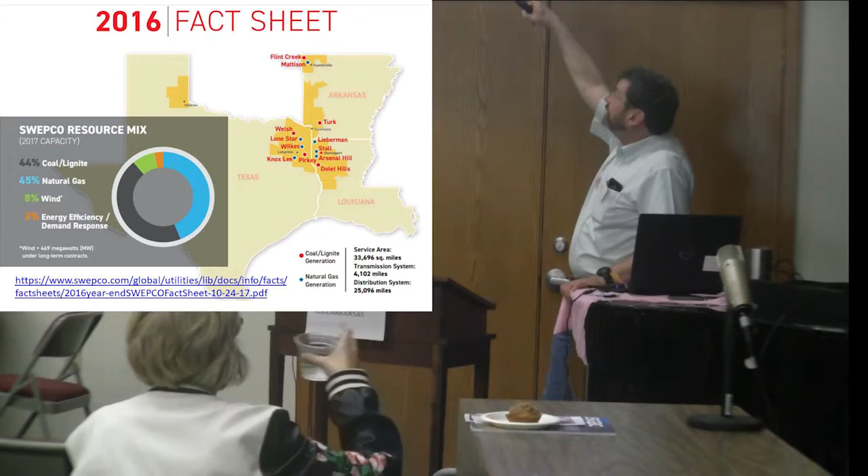So here in Northwest Arkansas, SWEPCO is one of the main utility providers. SWEPCO and the Ozarks. Help me out, Orlo. Thank you. So, but SWEPCO's balance at the present is almost 90% fossil fuel.

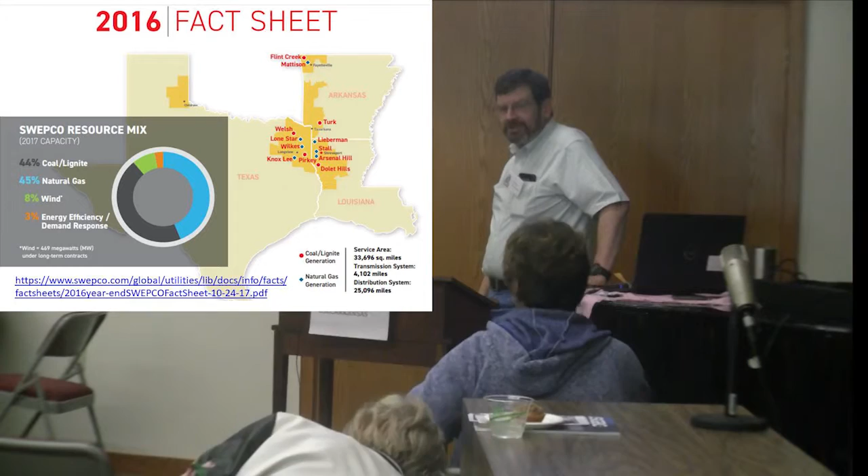So, what do you do as an individual? There's Arcadia where you can get... Good point, yes. So anywhere in Arkansas and anywhere in the country, you can sign up for Arcadia Power. ArcadiaPower.com, and you get 50% renewable energy for the same price you're already paying. Identical price, no more money.

And then for a few shekels more per month, you can get 100% renewable energy. What they do is they buy renewable energy credits. So yes, good point.

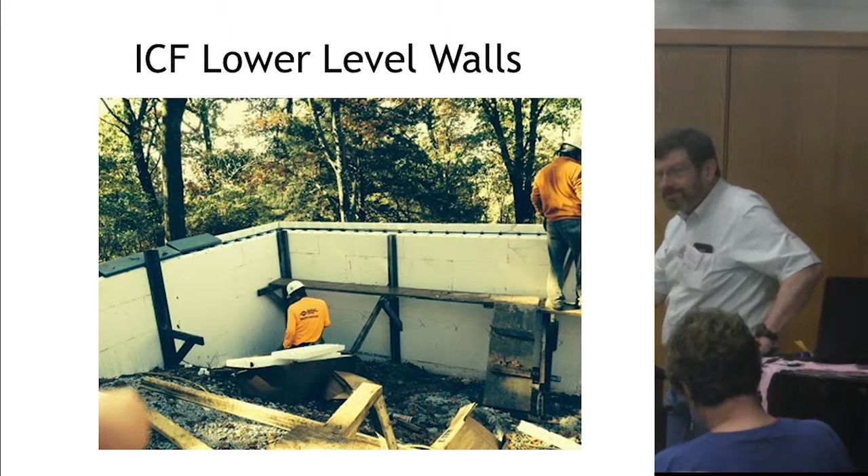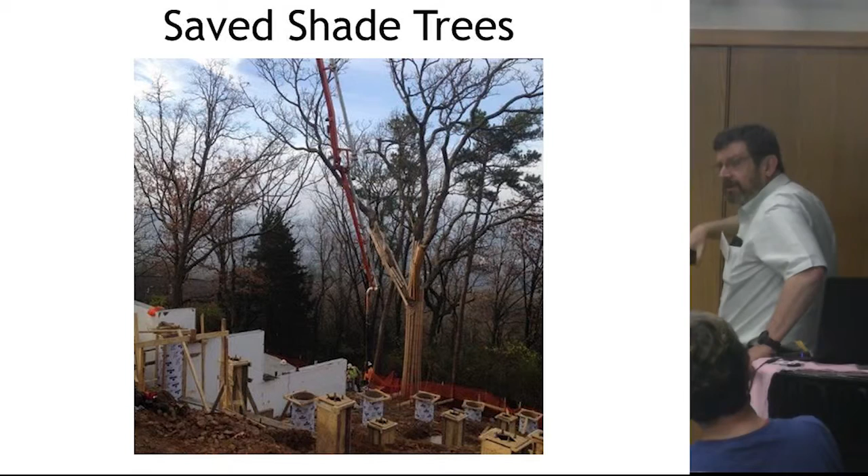Then you have to have rebar too, because concrete is good in compression, but not in tension. And that means that if you didn't have the rebar, the wall could fall over easily. And here's another view. And we protected the tree, and there's another elm tree in the front yard that got a little bit of protection as well because they were in the construction zone.

This shows the spray foam insulation, and it seals very well. So it offers insulation and sealing. Now there's three things you need to be concerned about in trying to reduce your energy consumption. One is convection, and then conduction, and radiation.

And this picture shows all three because the windows are high efficiency windows. That's where you lose your radiation losses. And the convection means like air loss. So if you're sealed tight, then you don't have air loss. And the conduction is the insulation properties. And I'll show you another slide in a moment.

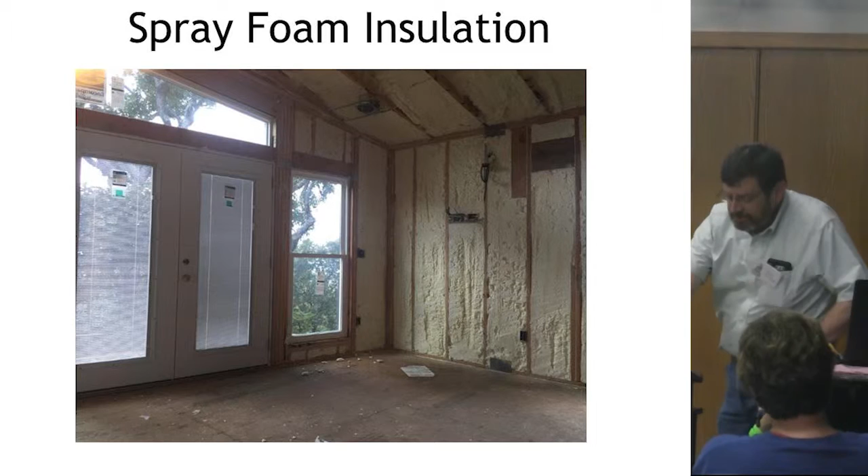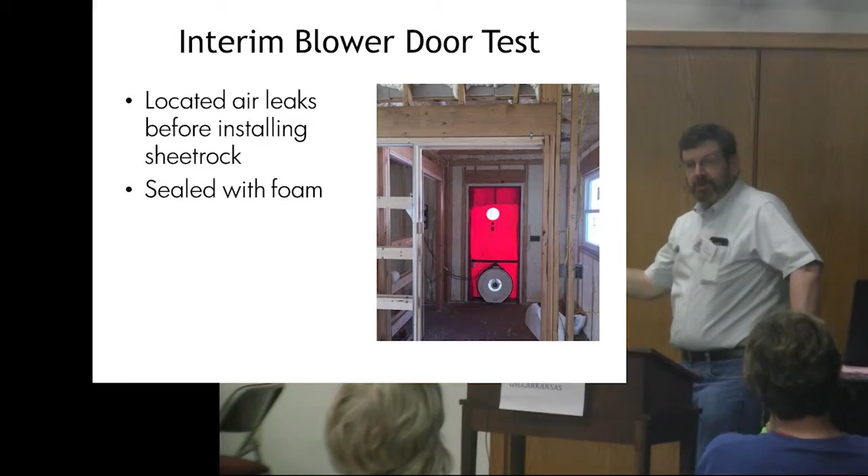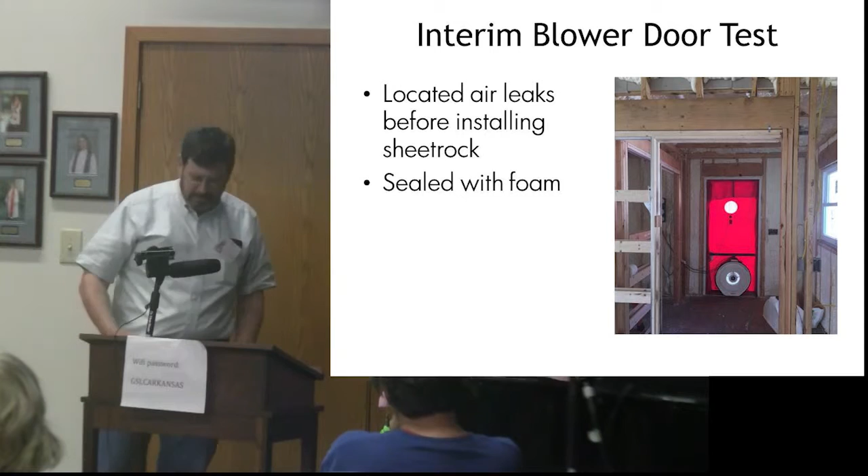Can you say what thermal bridging is? That's the conduction, like when you have a wood stud, there's a tendency, and the difference of temperature from inside to outside, either it's hot outside and cool inside, or it's cold outside and you want to stay warm inside. So the thermal bridging is that the studs are solid and they'll conduct energy from the inside to the outside or from the outside to the inside.

And that's what the infrared cameras tell you. So in order to prevent that, you need some insulation to cut the thermal communication with the outside world, essentially.

Also, now Michelle talked about heat pumps. Heat pumps are great. This particular heat pump is rated a 19 to 20 in cooling and 8.5 to 10 in the heating cycle. There's no gas line to the house, so it's an all electric home. So that was one thing that Michelle was just talking about.

Another thing is heating water, and so these are flash water heaters, electric water heaters, and they work great. And they're small. It's just a box about this big, about this thin, maybe 4 inches thick. And it heats all the water in the home. We have two of them, one for the lower 2 floors and one for the upper floor.

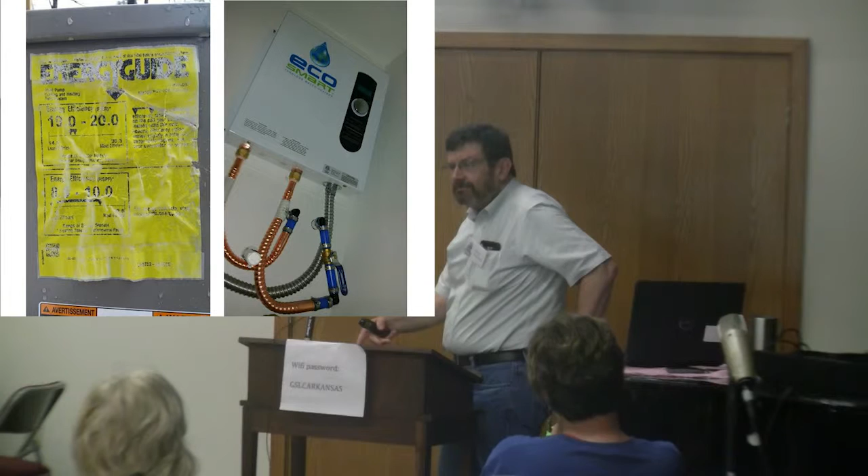We haven't had any trouble with them at all. Now, you do need to treat them for lime every once in a while, you know, get the scale off the pipes on the inside, but yeah, we haven't had any trouble yet. In 2 years, yeah.

This shows a couple of things. This shows both the employment possibilities of solar and, you know, our view, which is why we chose the site, and the solar panels. We have 42 solar panels at home, and they're the smaller size ones. The ones on the roof here are slightly bigger.

They're 72 cell units, so they're 2 meters by 1 meter up here. They're 1.8 meters by 1 in the ones we have at home. And those are 285 watts, and these are 320 watt units. So I could easily bore you with lots of details, but I'll go on.

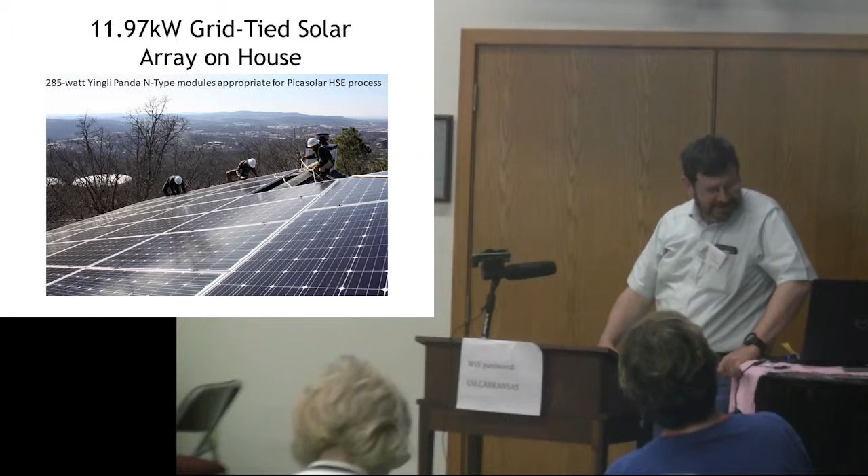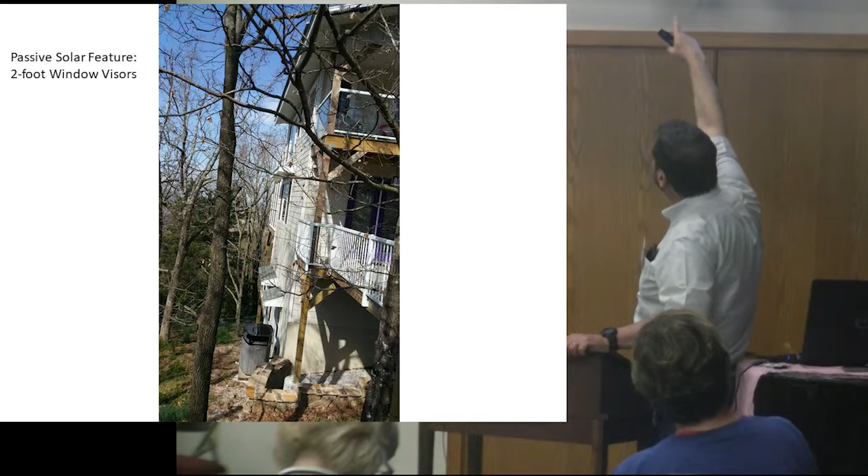Here we have another aspect of the home, and this is something Orlo has fought for his whole life since he started his company in '78. These are part of a passive solar design. Those little visors over the south-facing windows are about 2 feet, which allows sun in in the winter, and keeps the windows shaded in the summer.

And this is something else that Orlo told us about, these diamond-shaped blinds. These are good insulating blinds, and they provide like an air barrier between the room and the outside. And you have them at your offices. Yes, and at our home too. Yeah.

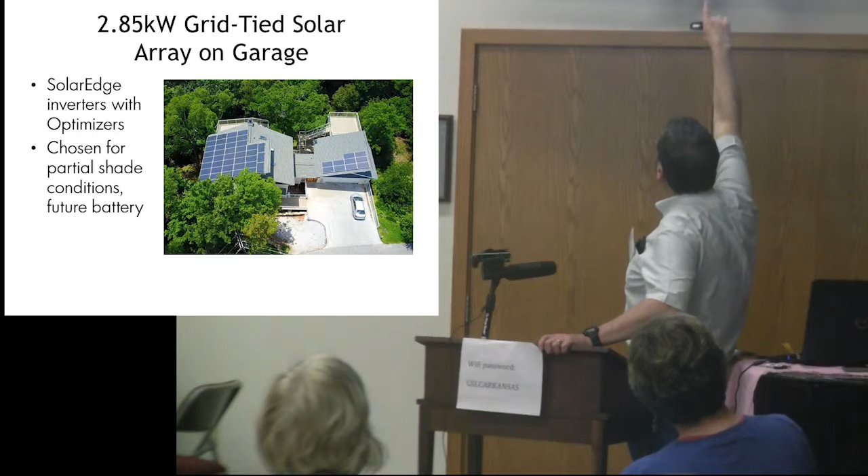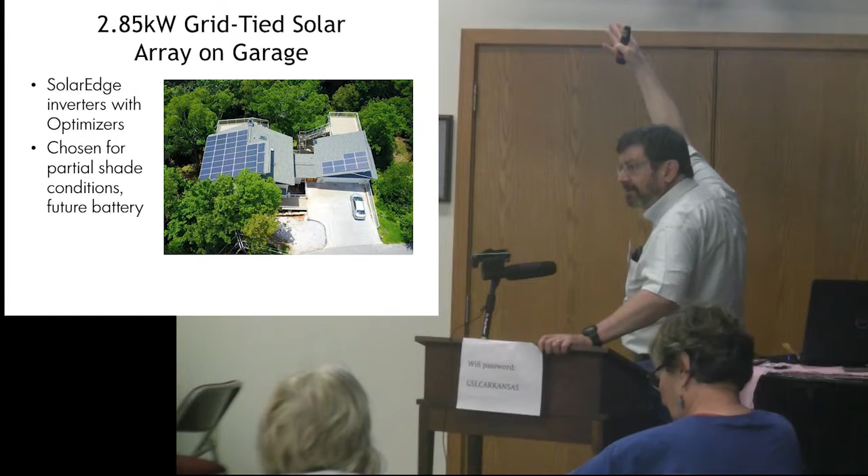Wait, so clear stories are what? Well, okay, there's north-facing windows. Yeah, this isn't going to work on there. But in the shade, there's vertical windows, and that's way up in the bathroom, so like 15 feet up. But it allows the roof line to continue on up.

You're still not, okay. Maybe I can do it with this. It's an extension of the roof like this. It's like a fake roof, with solar panels on it. Okay, see the cursor? So that's called a clear story. People do it for style, but he did it for solar. Right. I wanted the extra room just in case.

So, oops, oh no, I messed it up.

Okay, good. And this is something that Michelle was talking about earlier as well. This is a rating, and oh, I didn't mention something. This is a blower door test that's part of the construction process with the stick group. This is one that they own, and then the raters come in later on with their own official rating.

But in the stick group, Mac, the construction manager, used this to track down any leaks that he found, and he was able to fill them right away before the drywall was hung up. But you can get that on any house. Yeah, right, yes. Do the blower door test, yeah.

We did that in our Van Buren house that we retrofit considerably, and it had the same number of panels, a little bit less power, but it wasn't able to be a net zero home, although the solar was nice, and we had lots of extra features there. We insulated as much as we could, but you just can't do a retrofit as tight as you can do an intentional build.

Okay. So this is one of the results of using the blower door test. What it says is the average existing home rates 130 on this scale. Average new home would rate 100. This rates negative 27. Now the zero would be a net zero home without the transportation factor, without plugging in electric vehicles.

So the negative 27, we spent the extra money to get to that point in order to account for the cars. That's one way to think of it. And the electric vehicles cost much less to operate than a gas vehicle. They cost about 1/3 or 1/4 to operate. And when you have the solar panels, it's even less, because fueling a vehicle is much more expensive than fueling even your home.

And here's some proof. This is our energy bill. So zero energy used for over a year. So just the connect charge, just the customer charge, $8.76 a month. And here, that's an old photo, but this shows part of the feedback that I get every day, or anytime I feel like it, from an app on my phone to check on the solar system.

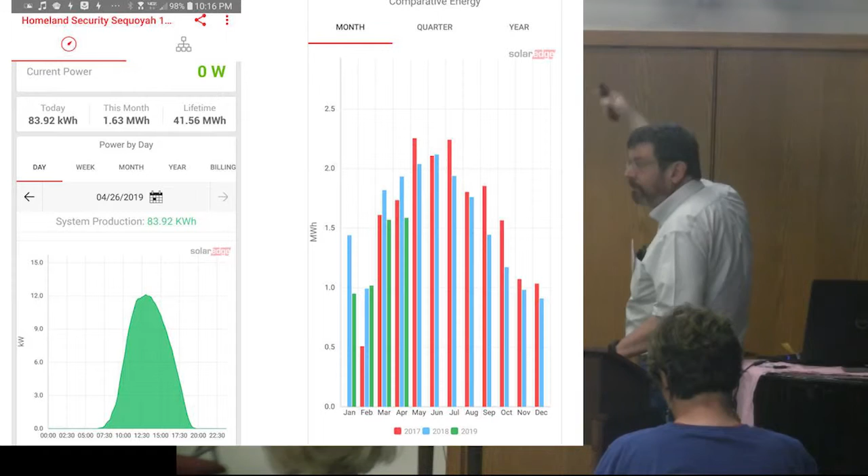And here's more recent data. So you can see 41.5 megawatt hours, and a megawatt hour is a lot of energy. A megawatt hour, retail, is worth about $100 or $110. So you multiply that times the 41.5 megawatt hours, and that's what we've generated in 2 years.

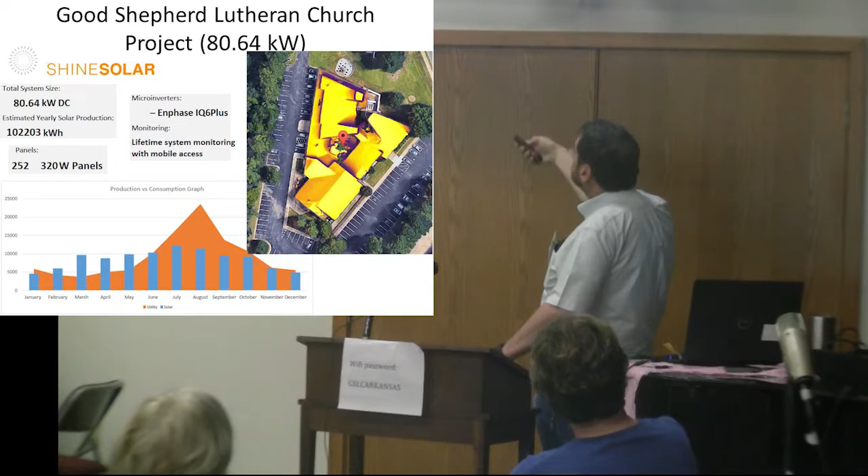And here's the plans for this church. I showed that earlier. And this is a reminder that $1.36 a watt is utility kind of pricing. Utilities pay that much money, or did up until recently. It's going closer and closer to $1 a watt, but a typical home installation is often probably $3 or $4 a watt. So we got an exceptional deal, and Shine did a good job. They're very organized, gave us a really low estimate, and followed through, did the work. So that's here. I showed that earlier.

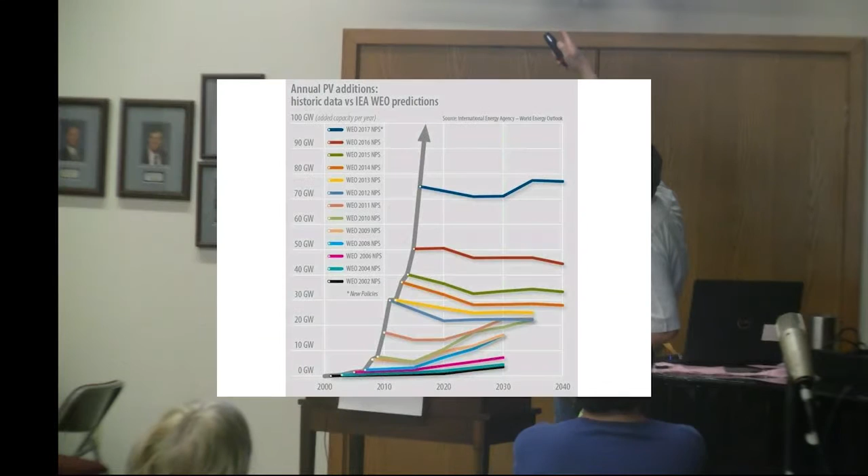And for a Model 3, like what I was able to get, Elon expects the batteries to last 300 to 500,000 miles of driving, and then cost about $4,000 to replace, which is extremely cheap relative to gasoline or diesel or any other way of transportation mobility.

I put this in here to explain: often in my class I show drag races between Tesla Model S performance vehicles and the fastest Lamborghini in the world. And for the first quarter mile, the Tesla's faster. So they're fast. They're not the old golf cart kind of technology. These are designed vehicles, and they're neck-snappingly fast.